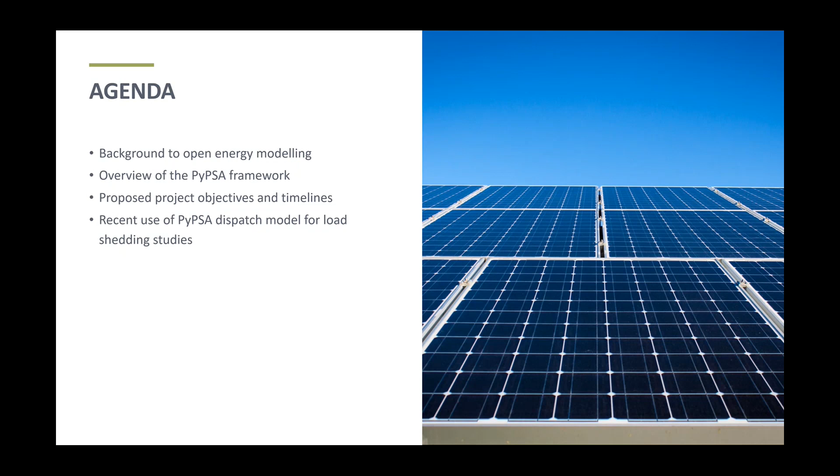I think collaboration is the main driver for this open energy work. And you'll see that there are definitely some areas where load research can play a very important role. And then finally, I'll provide a short overview of some of the recent PyPSA modeling that we did for some of our load shedding work.

So energy system modeling is a very broad term, and it can cover many different aspects of an energy system. From my perspective, we're really using tools to study both the design and operation of an energy system. We're all aware of the process that we go through in South Africa, the National Integrated Resource Plan. And just to drive home the importance of having an evidence base that can support decision makers on which technology should be deployed in order to meet specific objectives, such as decarbonization, security of supply, and energy system costs.

Typically, the primary objective of integrated resource planning is to ensure that there's energy security moving forward, and that this can be provided either at least cost or with policy adjustments to least cost, for example, decarbonization aspects and so forth.

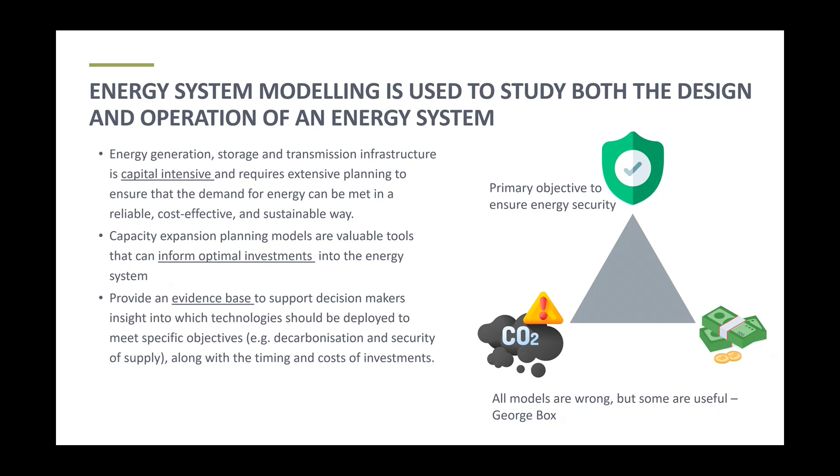I really like this quote that all models are wrong, but some are useful. It really is a solution space, and often an optimizer will give you a single solution, but it's really about exploring the impact of different inputs. It's a very complicated space, and often you're trying to project over multiple decades, so there's a high degree of uncertainty in the inputs that go into these models. So it's really about understanding the solution space and how these inputs interact with each other for different scenarios moving forward.

So in terms of an overview of the different types of models, I think we start with the one that people are most aware of, and that's really the capacity expansion planning. And that's looking at what are the generation, storage, and transmission investments that are going to be required. And that's typically done over years to decades in terms of the time horizon.

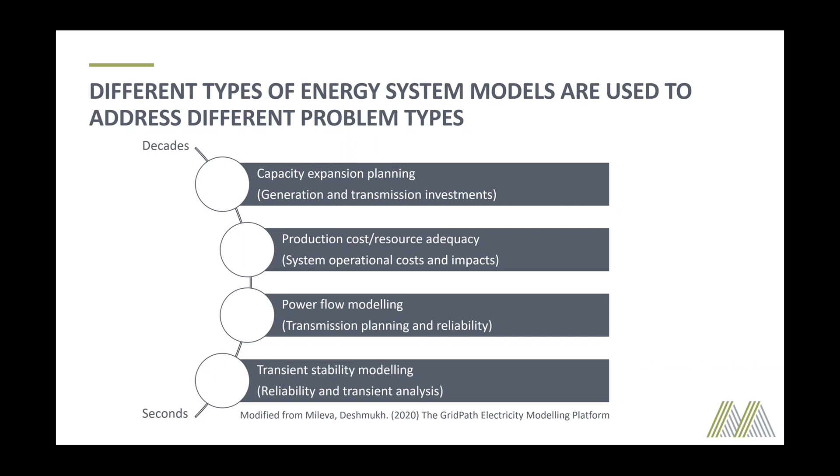Then if we look at a step down from that, once you have a set of resources, then looking at what is production cost and resource adequacy, and that might be anywhere between a day to a year, and it can be down to sort of 5-minute time intervals or typical hourly modeling. And then we start to get into more of the power flow and transient stability modeling, and then you're starting to get down to very short time periods. So typically, when we're talking about energy system modeling, the work that we are focused on is really around these two first bullet points around the capacity expansion and then production cost resource adequacy.

So in terms of what actually goes into one of these models, really, essentially what you're building is a linear programming model. So it's a linear modeling world that can either be mixed integer linear programming, if you have things like unit commitment, or it can just be linear relaxed. And typically the objective function is to minimize costs for a different scenario. So these costs will be a sum of annualized capex costs as well as marginal costs, and then finding what is the optimal investment point to minimize over that time horizon.

The typical inputs that go into this model include historical load data. Typically, we're working in hourly increments. So historical, what the profile looks like, and then also projections in terms of how the load profile is projected to grow over time. On a national level, this tariff structure block doesn't play too much of a role, but we also do this for industrial customers where Eskom is kind of seen as a generator, and then we would want to understand what their tariff structures are and how that tariff structure could change over time.

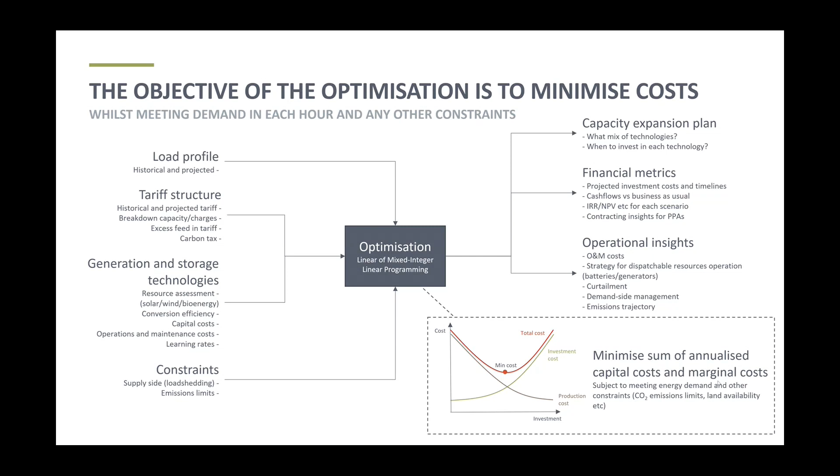And then really details around different generation and storage technologies, ranging from doing resource assessments, and then having a good view on the conversion efficiencies, most importantly, capital costs and operating costs. And really, many of these technologies are still coming down a learning curve, especially battery energy storage, and what kind of role that can play. And then essentially coming out of this model, we would really be aiming to answer the question, what is the mix of technologies and when to invest in specific technologies? If we're doing this more at an industrial site level, then we would also be looking at some of the financial metrics and also operational insights, especially around dispatchable generators, battery storage, what the best way to operate a certain mix of assets would be.

So this is currently a small version of our model that we use to assist many of our industrial clients. It's essentially a two-node model that allows for both on-site generation and off-site generation with wheeling through the grid. So essentially we have a demand profile that needs to be satisfied over time, depending on where the site is located, what kind of available space they have, what different resources they have. We would then optimize what their investment should be in their own technologies.

Most importantly, we have implemented the Eskom wheeling tariff and the rules of that wheeling tariff exactly in the optimization. So essentially, any energy that goes through the grid to the end client is then billed at the Megaflex tariff per time of use bracket, and then you get credited at the WEPS rate for different wheeled generators. And then really the constraint that you can't wheel more in a time of use period than your demand. So we've been using this model for quite a few customers, just trying to understand this balance between on-site and off-site generation and what different optimal mixes could look like.

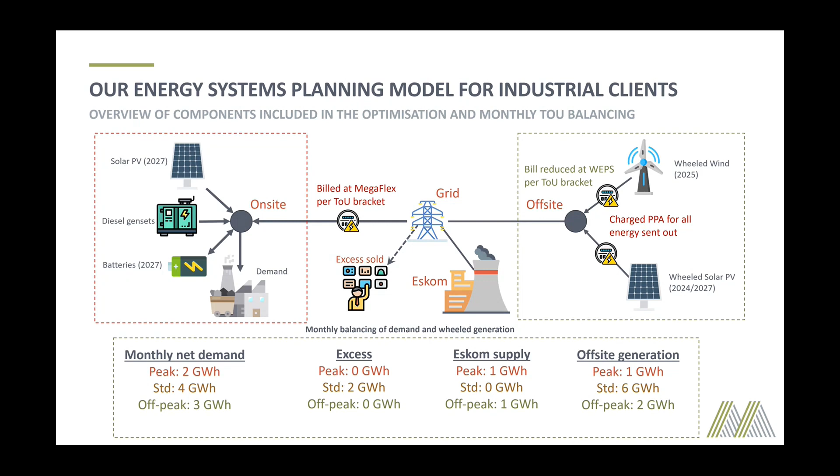So when we talk about open modeling, there's really two aspects to this, and the first is around open data, and this is really around data that is publicly available. There's been lots of inputs from different stakeholders. There's nothing in that data that is obscured, so this data can be thoroughly interrogated. And then the second part of that is open source modeling, and having models where essentially you can see all the source code, you can see all the assumptions, how different parts and components are implemented in that model. So you essentially start with a process that is completely transparent.

And I think historically, a lot of this has been done in commercial tools, with Plexos being the most well-known one that's used by many utilities and governments around the world for planning, and used in South Africa as well for the National Integrated Resource Plan.

But essentially, one of the issues with these commercial tools is that they're really very closed in nature. So due to license fees, it's essentially a black box to people outside of the organization doing the modeling. So it's very difficult to critique how the models are structured. Yes, there is some transparency in terms of assumptions, but the nitty-gritty within the model itself, it's difficult to completely interrogate that.

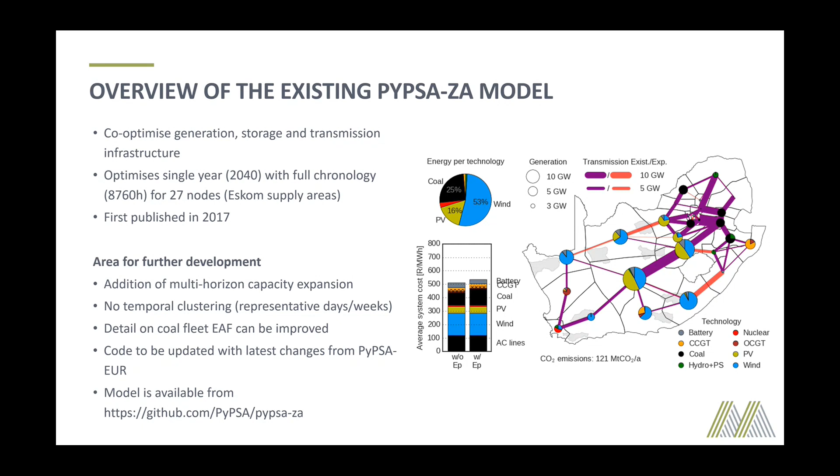And I think the spatial distribution aspect is one that really could need more focus moving forward. Especially given some of the grid constraints, especially in the Northern Cape, really understanding, instead of having a single node model, this distribution of resources across the grid is going to become increasingly important.

So a little bit of a snapshot of what we are aiming to do with our project. This is a project that is donor funded from European donors to really look at setting up this updated version of that model, which will be publicly available for anyone to use. So the first work activity is around updating the code base with any more recent changes from PyPSA Europe. We've spent quite a lot of time looking at what the best solver is to utilize.

So that is the one caveat with a lot of these open source models, is you can set up a problem that can be solved, but you still need an efficient tool that can actually numerically solve those governing equations. There are free solvers available out there, but typically the problem size is quite limited. We've done an evaluation test of different commercial solvers, as well as cloud-based options that are not as onerous in terms of costs.

We then are in the process of updating the PyPSA model, and then also really adding this. At the moment, we're busy coding the multi-expansion part. And we've been spending some time looking at it from, if we're going to do perfect foresight, which is essentially the model can see the entire optimization window at once, so it knows ahead of time what would happen in 2040, for example, or more of a myopic expansion view where the model only sees the year that it is optimizing, and then it carries those existing assets into the next year until they ultimately get decommissioned.

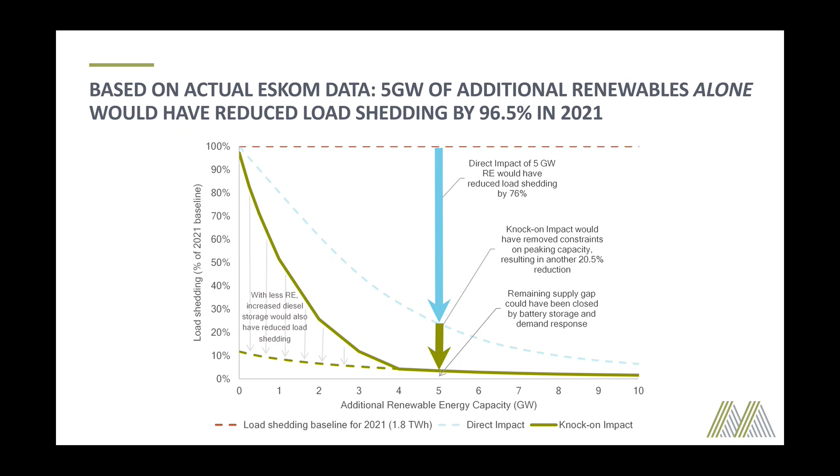And I think the startling outcome of this result is that we could have reduced this load shedding and we would have still seen a net saving to Eskom in the order of 2.5 billion rand. And that's purely through reduction in diesel consumption for the peaking plants. So, what the dispatch model that we used for this work actually looks like.

It's a single node model where essentially we model different generator types as an aggregated generator. So we didn't model each of the coal plants separately. They're modeled as one coal unit, but we do have ramping constraints. So the fleet is not allowed to ramp at more than what Eskom actually achieved in 2021.

In terms of pumped hydro storage, it's split, so we have upper and lower dams. We also, for the pump storage assets that are used for water transfer, include some of that in the model as well as extra inflow into the dams. On the OCGT side, we did try our best to model diesel storage. So we don't allow the OCGTs to just run and assume that fuel is always available. So we have a diesel refuel rate, which we calibrated to 2021, and in the order of 27 megaliters of diesel storage.

The model also includes reserve requirements. So we have 2.2 gigawatts of reserve that must be available from a combination of the pump storage assets plus the diesel storage plus any battery backup. And we also have fast acting reserves that can only be supplied, I think we used up to a gigawatt, from pumped hydro storage and any battery storage assets that are added to the grid.

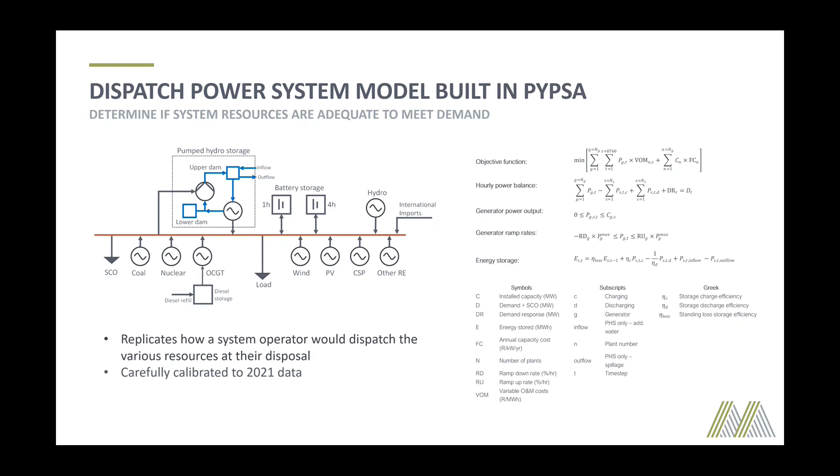So we really spent a lot of time to calibrate this model to the data from 2021 and got actually within 1 or 2% of the actual load shedding. So essentially, when there's unserved energy, then that's represented as load shedding. So what this dispatch model does is it provides a relatively good view of how the system operator would operate a different fleet of resources in order to try to minimize costs as well as any load shedding events. And obviously, if there is insufficient capacity online, then trying to minimize that impact.

In terms of the forward-looking view, we modeled a range of different scenarios, particularly around the coal fleet EAF, as well as what demand could do over the next 4 years. So I think it's a graph that many people would have seen. Unfortunately, Eskom doesn't publish the coal EAF in isolation. It publishes the entire fleet EAF. So we had to do a little bit of back calculating to try work out what the contribution from the coal fleet was. And really seeing this trend of about 2% per year compounded, decreasing, and looking even worse year to date. And I think the real challenge is that the input assumptions to IRP 2019 were that the coal fleet EAF would already be above 70% to date.

So we really looked at some different trajectories. So if this could stabilize compared to if we continue along this track, what could happen? This little bump that you see in EAF here is there to simulate the return to service of one unit at Medupi after repairs.

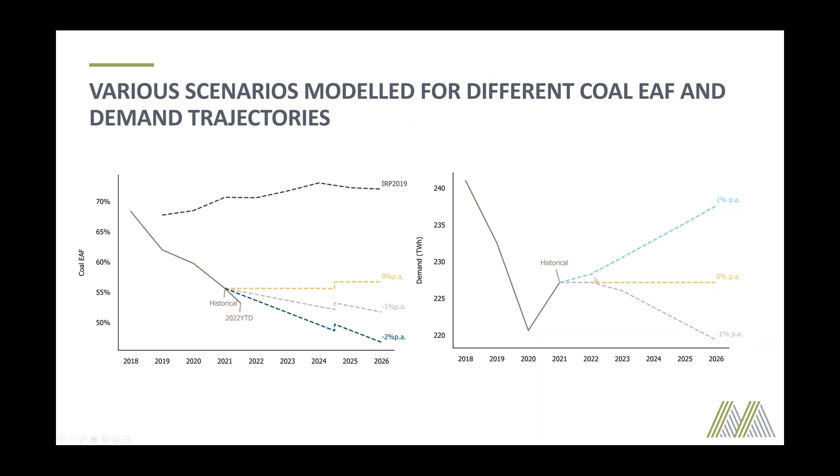In terms of demand, obviously with COVID, a significant drop in demand. There's been some recovery, and ultimately, if we were looking at growing the economy, we need to be planning for an energy system that can accommodate a growth in demand. Ultimately, in our solution case, we're targeting being able to supply for a 1% growth in demand. But in the base case, we also did look at if demand remains flat or even if demand decreases over time.

So in order to analyze the base case, which is really the existing resources that we expect to come onto the grid over this time, we started off by assuming that only 50% of bid window 5 solar projects will reach financial close, and 70% of wind projects will reach financial close. So the underlying assumption behind this is really twofold. Local content issues on solar PV plants, and then for both solar PV and wind, issues around the global energy crisis that we're seeing, and really rapidly rising prices. So many of these projects were very aggressively bid, and with the growth in costs of some of these technologies, there's a real risk that many of them won't reach financial close without some kind of intervention.

We then assumed that bid window 6 projects can reprice some of that risk in, so all of those would come online, but limited again to the size of bid window 6 with no increase in size. In terms of risk mitigation, we looked at only the projects that didn't have imported gas, and 375 megawatts of firm capacity, and those generators are not reported as separate solar PV, wind and storage generators. Essentially, they're this lump generator, and it will follow the 5 a.m. to, I think it's 9:30 in the evening, generation profile.

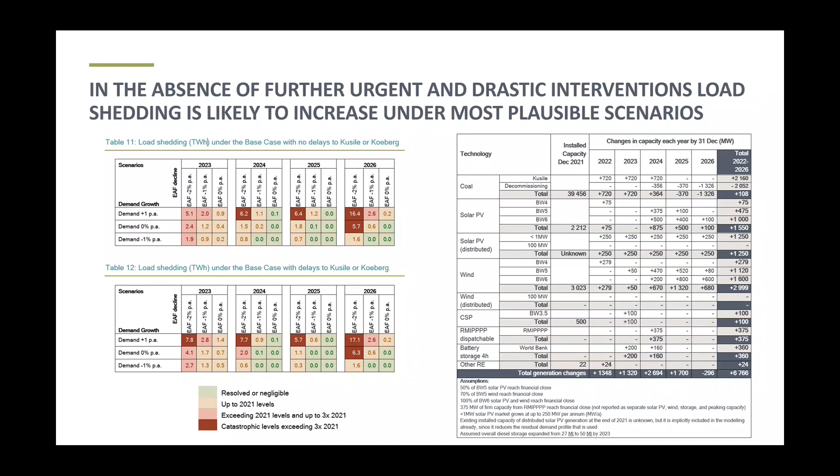So I think essentially our conclusion from this work is that in most plausible scenarios, as the coal fleet EAF continues to come off, and even for flat demand, there's really a significant risk of load shedding without different interventions that can be made. So, of course, the aim of the paper was to provide insights and some recommendations from our side. Our managing director, Grové Steyn, is very involved in that space. But essentially, the aim would be to distribute those risks.

So instead of having a central procurement process, to try spread what needs to be done in terms of installation of new renewables across as many different economic actors as possible. So definitely continue with the centralized government procurement programs under REIPPPP. In terms of risk mitigation, at the moment, because the projects have to be sized to provide that specific firm capacity, there is essentially a huge amount of overbuild. If we take the projects that have signed PPAs, the actual size of the solar installed capacity is significantly larger than the committed firm capacity.

So one of our recommendations there is really we need all the capacity we can, and we should not be curtailing a single kilowatt hour of energy, and also to give Eskom access to the battery storage assets for control. Looking at doing what can be done to increase the likelihood of bid window 5 closing, and then significantly expand the size of bid window 6. We have a narrow window of time in order to get more capacity online before 2026, when we start to really see the coal fleet start to be decommissioned.

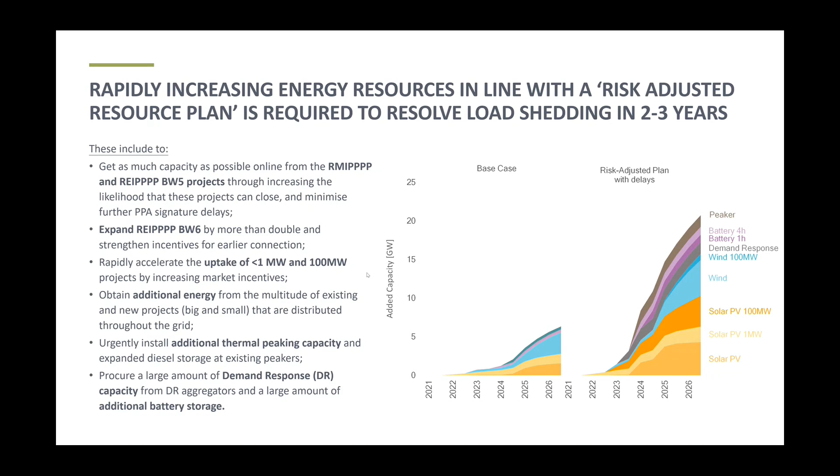But we do recommend as an insurance policy the installation of about 1.5 gigawatts of peaking capacity that can be used should some of the targets around renewable installations not be achieved. This just gives you a snapshot of the base case and the solution case and how the energy mixes change. Naturally, you wouldn't have this much load shedding from this capacity gap. Essentially, you'd be forcing or limiting any energy demand growth. So this is both for 1% per year growth in demand.